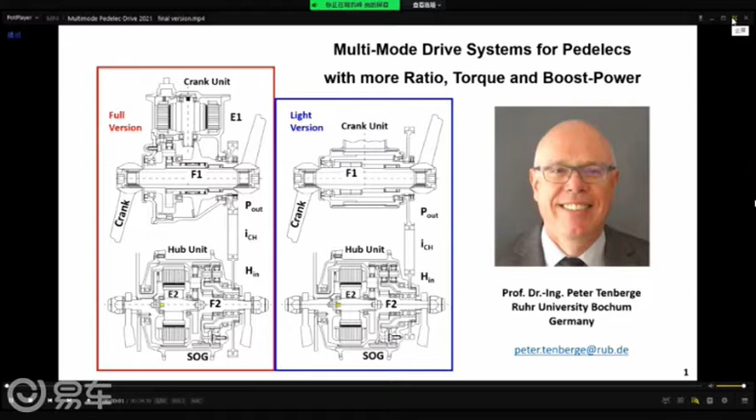Ladies and gentlemen, welcome to my speech about new multi-mode drive systems for Pedelecs. This paper is about two new drive systems for Pedelecs which are split onto a crank unit and a hub unit, and which do not need any additional multi-speed transmission or continuously variable traction transmission.

In a full version of this drivetrain for trekking and cargo bikes, the first electric motor E1 in the crank unit supports the crankshaft. The second motor, E2, in the hub unit controls the transmission ratio, but can also boost the bike in most driving situations.

In the light version of this drive system, for example for city bikes with limited top speed, the motor E1 can be omitted because E2 also provides sufficient electrical boost support.

With the following slides, I will explain the market situation of Pedelecs in Europe and especially in Germany, then the design of these drive systems, and finally some simulations to show the advantages and performance of this technology and the chances in the market.

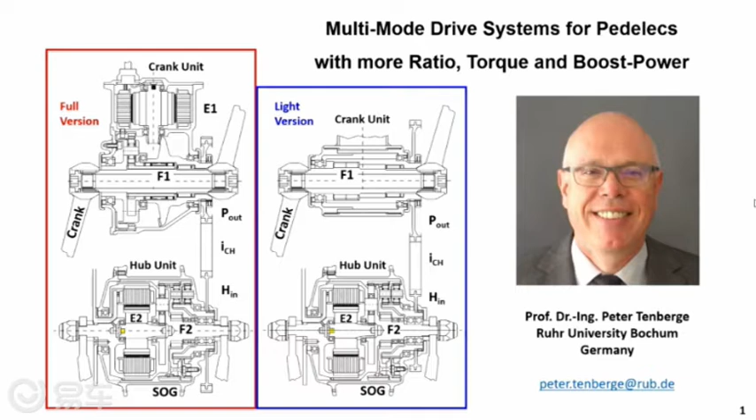My name is Peter Tenberge. I'm a professor from Ruhr University Bochum in Germany. For about 45 years I've been working on transmissions for any kind of vehicle, and my first contact with this kind of power split transmission was already in 1981.

The market for Pedelecs in Germany has grown in the last 10 years from around 0 to more than 2 million units per year. The annual growth rates have been in the two-digit range for years.

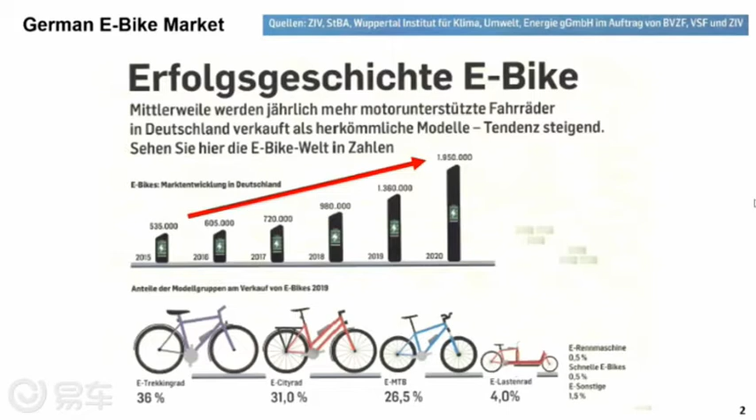More and more customers are opting for these bicycles and like the new driving experience with such a relaxed driving style. During this time, many researchers and developers have enormously improved the power density and controllability of the drive systems, and year by year there are always new providers in this market with interesting drive concepts.

In Pedelecs, persons mainly drive the two-wheelers. They apply their drive torques with their feet via pedals to the crankshaft in the crank unit. Their drive torque is transmitted to the driven rear wheel via an intermediate gear.

If necessary, the driving person is supported by a small electric motor, which either operates with a constant ratio onto the output shaft of the crank unit, or which sits in a hub unit of the driven rear wheel and operates there also with a constant ratio onto this wheel.

In A, this figure shows an S-pedelec for higher speeds, bigger than 25 kph, with an electric motor with a peak power of 800 watts in the rear wheel hub and a chain transmission with 11 speeds between the crank unit and the rear wheel.

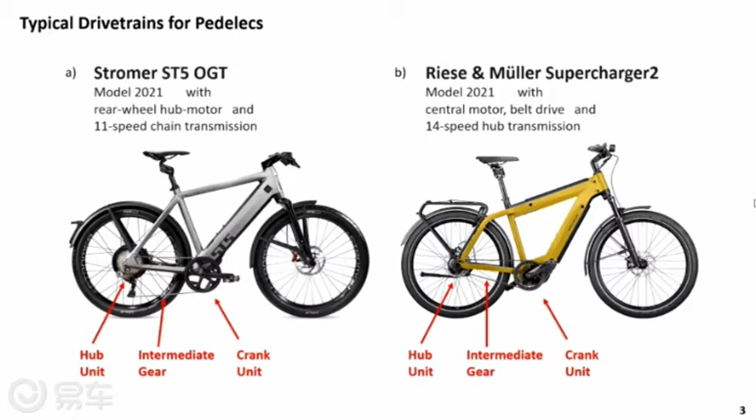In B, it shows a pedelec with an electric motor with up to 500 watt short-term peak power, which is built into the crank unit and which supports the bicycle up to speeds of 25 kph.

This slide shows in A a characteristic map of an electric motor for a pedelec with a maximum torque of 4.5 Newton meters and a short-term maximum power of 500 watts.

The operating software for the pedelec controls the support power in different operating modes. The standard options are 3 to 5 levels of torque support, always proportional to the driver's torque. A fairly new option is a continuously increasing torque from the supporting e-motor if a pre-selected maximum drive power of the driver is exceeded.

That means the driver can specify which physical load he would like to apply for driving at the moment. The remainder of the current power demand of the bicycle should then be provided by the electric support system.

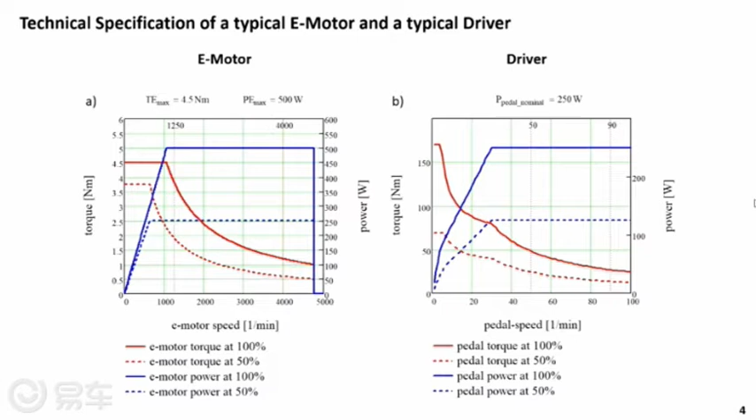The slide exemplarily shows two characteristics of a driver's torque capability to perform at 100% or at 50%. A driver can apply very high torques to the crankshaft at low crank speeds. Older and sick people sometimes have completely different performance maps, or even different performance maps for their left or right leg. Very sporty drivers can achieve significantly higher levels of performance over longer periods of time. In the current bike market, very different drive systems for a large number of driver characteristics can be found.

This slide illustrates the performance of an exemplary pedelec with a total weight of 130 kilograms. In this driving situation, the model driver is ready to stress himself with 100%, meaning a maximum power of 250 watts. The electrical boost should be switched off for now. In this example, the transmission system provides gear ratios between crankshaft and wheel between 1.65 and 0.3. This means the driver can, for example, drive a nominal crank speed of 60 rpm in a speed range from 5 kph to 27 kph.

Below and above the limit ratios determine the crank speed as a function of the driving speed. With this performance of 100%, this driver can climb an incline of 20% up to a speed of 3.5 kph with a pedal speed of 43 per minute, generating a wheel torque of 90 Nm. But even at 5 kph, his power is only sufficient for an incline of 13.5% and a wheel torque of 63 Nm at the crank speed of 60 rpm. Such a strong driver can move this bike on a flat road at speeds just below 30 kph.

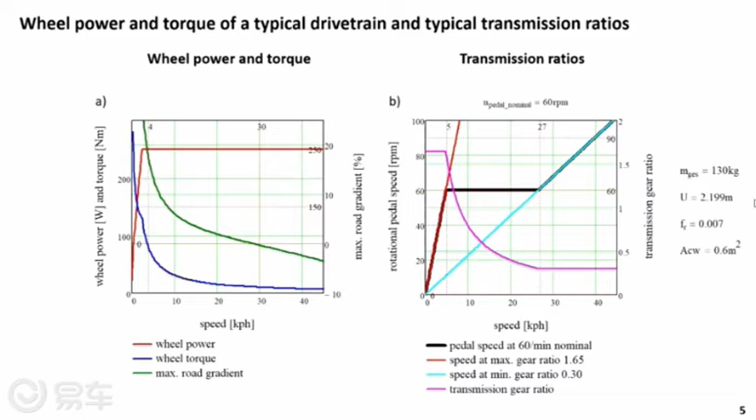A driver who is only half as strong can only drive uphill an incline of approximately 6% at 5 kph and can only reach a top speed of 21 kph without electrical assistance. These physical relations show when and how much an electrical support system should support drivers who currently want to ride with less physical power.

This slide illustrates a possible structure of the drive system of a pedelec with an electric motor in the crank unit and a 14-speed gearbox from Rohloff in the hub unit. The rotor shaft of the electric motor E1 lies parallel to the crankshaft and is connected to it via several gear stages with constant ratios. These gear ratios are in a total range of 25 to 35. A freewheel F2 is located between the electric motor and the output shaft of such a crank unit.

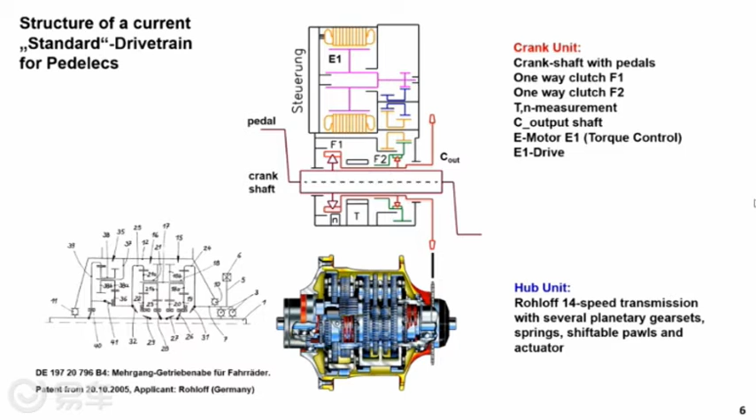This is used to ensure that at speeds above 25 kph, at which in Germany the electric motor is not allowed to support the pedelec, the electric motor can be switched off and no longer has to be dragged along by the crankshaft. Another freewheel F1 is located between the crankshaft and the output shaft of the crank unit, so that the electric motor can alone move the bicycle in a push mode at low driving speeds without the cranks rotating. Two sensors are used to measure the speed and torque on the output shaft of the crank unit, somewhere between the freewheels F1 and F2, in order to know the driver's current performance.

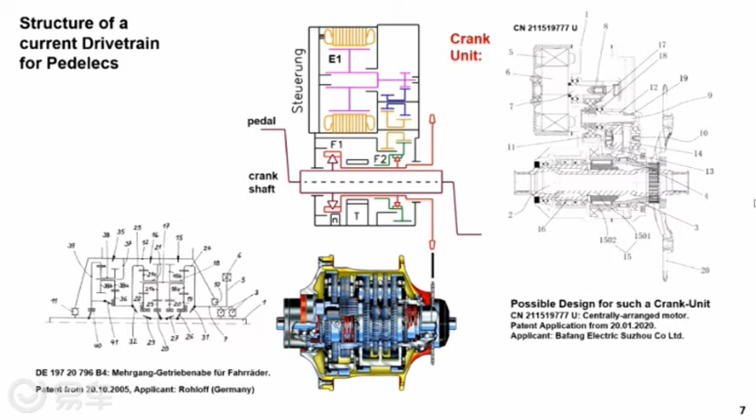Plenty of embodiments of crank units with an integrated electric motor, and also of hub units with an integrated electric motor, are known from the prior art and in particular from the patent literature. There are also companies that offer products for crank units and hub units as well. For example, on the right side, the design of a crank unit from a Chinese supplier with the structure from the left side is shown.

And from the same company, a compact hub unit is known, which is again shown on the right side of this slide. This hub unit has a small electric motor with internal rotor and a planetary gear stage for a large ratio between the rotor shaft, which is connected to the sun gear of the planetary gear stage, and the wheel hub, which is driven via the ring gear.

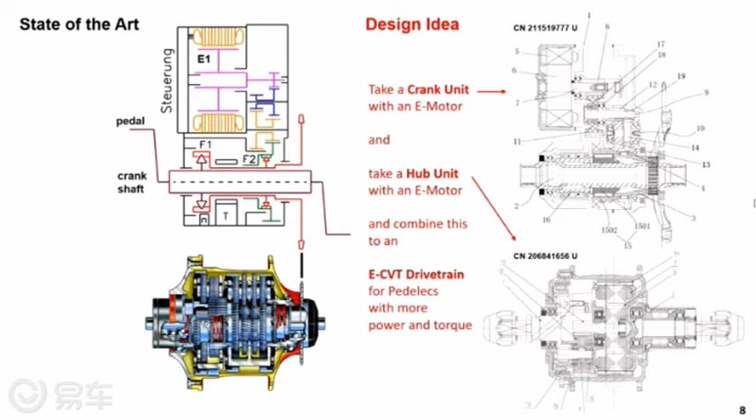From plenty of analysis of existing drive systems for pedelecs, the idea arose to design an innovative and new drive system for pedelecs with two electric motors, which are split onto a crank unit and a hub unit. The first motor in the crank unit shall be used mainly to support the driver, and the second motor in the hub unit shall be used to control different ratios in a continuously variable way.

In principle, the idea is to use the technology from the Toyota hybrid system in a bicycle. The Toyota hybrid system has already been very successful in cars for more than 25 years. It links the crankshaft of a car and the wheel shaft of a car by a speed overlaying gear with a third shaft, or ratio control shaft, which is driven by the second e-motor E2.

This subsystem already offers a continuously variable ratio control, but it is usually limited in terms of output torque. Therefore, another first e-motor E1 operates with a constant ratio directly onto the output shaft. Without any shift system, the Toyota hybrid system offers a very big ratio range to drive small and mid-sized cars very efficiently, because the two e-motors make all hybrid functions possible, like purely electrical driving and energy recuperation.

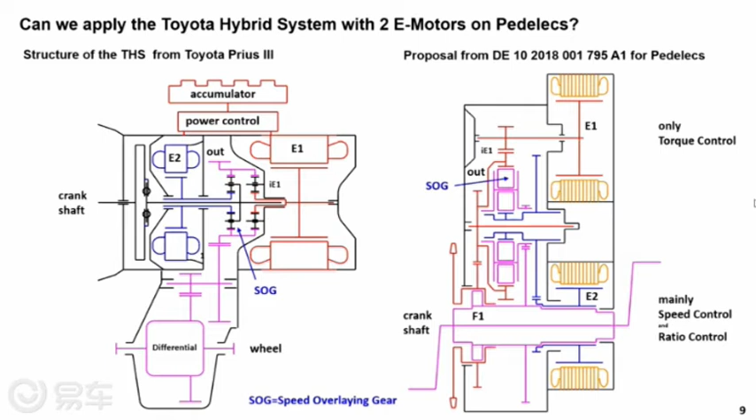In a still young state of the art regarding drivetrains for Pedelecs, there are already some proposals for such drive systems with an electric motor and with continuously variable electrical ratio control in the crank unit. The drive system shown here on the right side is a technological copy of the Toyota system in a special layout for bikes. It will definitely work well, but in this arrangement the crank unit becomes big and heavy.

Therefore, again, the design idea is to design a drive system for Pedelecs with an e-CVT function by two electric motors, which are split onto a crank unit and a hub unit. Two smaller subsystems can be easier hidden between the pedals of the crank unit and in a small wheel hub.

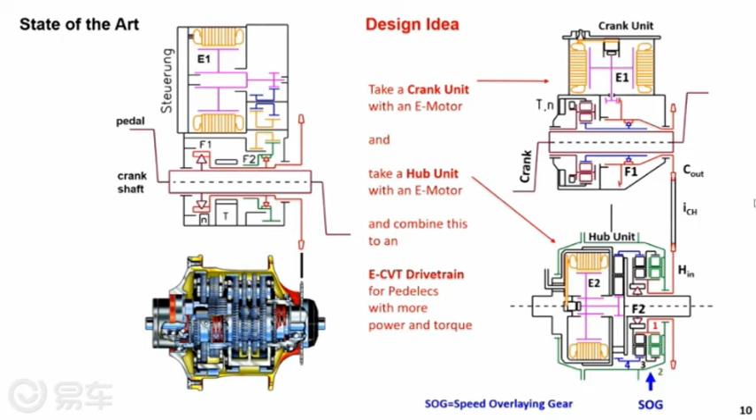Another task is to lay out the system in such a way that in the main speed range above 15 kph, the boost power is transmitted almost evenly via both electric motors. The new two-motor system shall not be bigger and heavier than the conventional drive unit for Pedelecs with one motor plus the necessary multi-speed transmission, and shall offer at least the same driving performance.

This central slide of this presentation shows the basic structure of the new Pedelec drive, which has two small electric motors in the full version. The first electric motor E1 sits in the crank unit and takes over the torque support for the driver, as this is known from conventional Pedelec crank units.

A second electric motor, E2, is located in the hub unit and controls the ratio, but also provides a considerable part of the torque support. The two drive units are linked by a wrapping transmission like a chain drive or a belt drive. In this exemplary layout, its constant ratio is 1.58.

In this crank unit, the crankshaft does not act directly on the output shaft via a freewheel F1, but by a planetary gear stage with a ring gear fixed to the housing. This gearing increases the speed of the crankshaft by a factor of 3.5 and thus reduces the driver's torque by the same factor. This has two advantages.

At first, the freewheel F1, which here is arranged between this planetary gear stage and the output shaft, becomes much smaller and lighter. At second, the driver's torque is now measured in the stationary housing connection of the ring gear of the planetary gear stage.

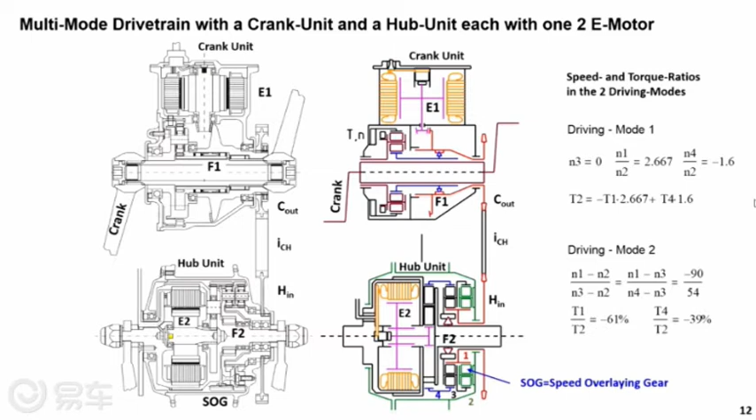In this layout, E2 provides 39% of the wheel torque, and E1 plus the driver provide 61% of the wheel torque.

All the interactions of the subsystems, and in particular of the two electric motors in this drive system, can be explained in the best way by using a few simulations.

This slide 14 illustrates this in a driving situation in which the required output power increases rapidly with increasing speed to 250 watt and then remains constant, as shown in C.

B shows the curves of the speeds on the crankshaft and on all four shafts in the speed overlaying gear. In such a speed overlaying gear system, all differences of shaft speeds are in constant ratios. At approximately 18 kph, all shafts in this subunit rotate with the same speed.

Then the transfer efficiency is almost 100%. At bike speeds below 7 kph, the freewheel F2 is closed, or the speed of shaft 3 is controlled close to 0 RPM. The vehicle then starts off with an almost constant overall gear ratio.

In E, the speeds of the two electric motors can be seen. E1 rotates proportional to the crankshaft. E2 controls the overall ratio, the course of which can be seen in F.

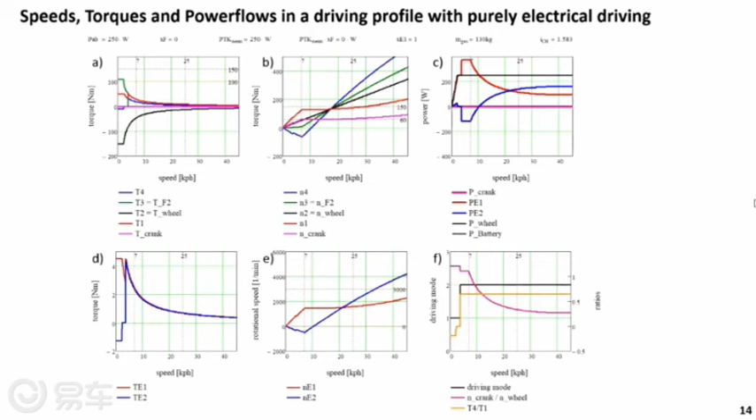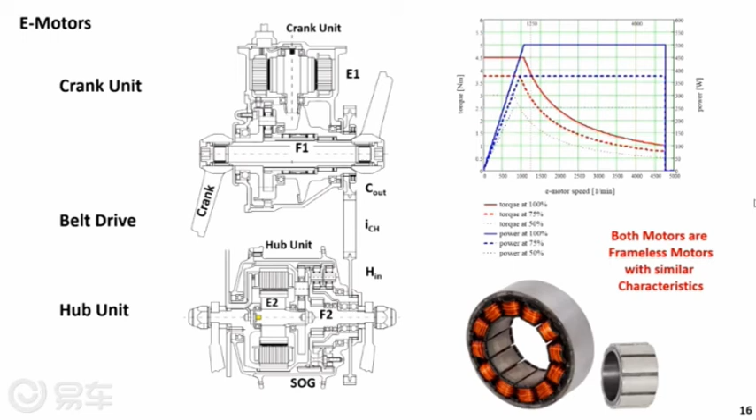Many suppliers offer such motor components with stator diameters between 77 mm and 85 mm, for the required maximum torque of about 4.5 Nm and for maximum rotor speeds of at least 4,500 rpm.

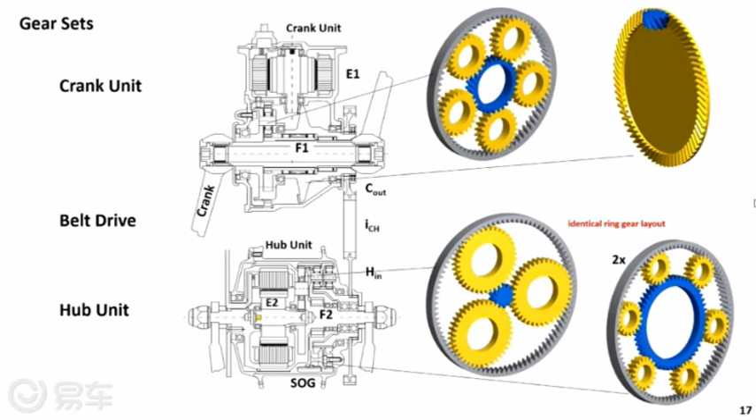In the hub unit, all ring gears have the same toothing layout. In the speed overlaying gear, the two sun gears are also identical. The multimode drivetrain uses two freewheels.

The freewheel F1 in the crank unit can be designed as a very compact needle roller freewheel because of the low torque load. The freewheel F2 in the hub unit is designed as a Sprag freewheel with high torque capacity. Schaeffler, GMN, and other worldwide operating suppliers offer suitable freewheel couplings for these drivetrains.

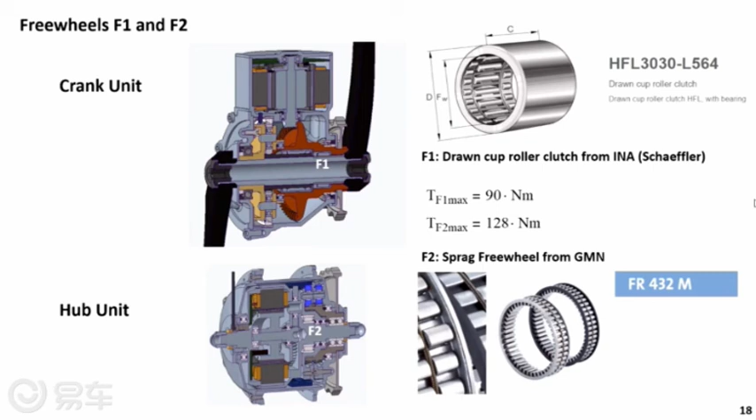Here the full version of the multi-mode drivetrain is shown in a 3D design. The components of the crank unit, including the first electric motor, are very compact, arranged in a main housing with two covers. The components of the hub unit are coaxially arranged in a two-part housing.

Let us now discuss a very compact, light version of the multi-mode drive system. This is interesting because it has only one e-motor but offers continuously variable ratio control and an automatically adjusted electrical boost. In this light version, the motor E1 is omitted, and therefore the crank unit can be simplified a lot. The shaft 1 of the speed overlaying planetary gear in the hub unit is only driven by the crankshaft.

The electric motor E2 has to support a torque proportional to the crank torque in driving mode 2 with the ICAVP function. This constant torque ratio leads to a boost factor, meaning the battery power, respectively the power of E2 in relation to the crank power, increases automatically with the driving speed.

This light version always needs a battery, because the one electric motor must always be active. But with today's battery capacities, this is not a problem, especially since the customers addressed with this drive system anyway want to use always some electrical support.

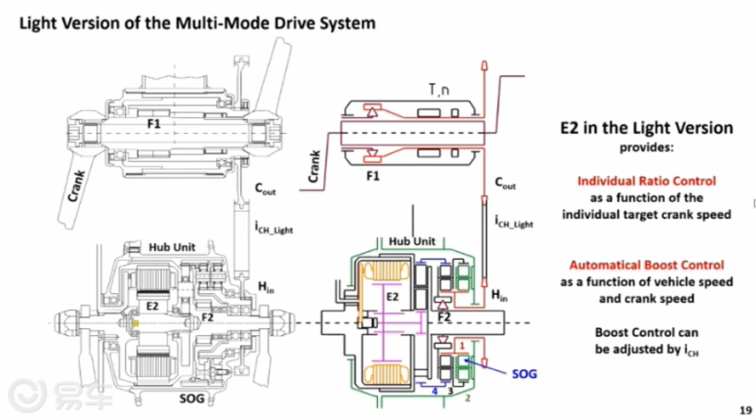If the electrical system fails, a purely mechanical transmission ratio remains in both versions of the multi-mode drive system. In this configuration, this maximum ratio is 1.206. With this ratio, the bicycle can be moved with high torques and reduced speeds.

Slide 20 illustrates some boost factors at bike speeds above 8 kph in the power split driving mode 2 for nominal crankshaft speeds of 50, 60 and 70 rpm, which are achieved after starting at standstill of motor E2. The higher the driving speed and the lower the crankshaft speed, the faster E2 rotates. Then at the constant torque ratio between crankshaft and motor E2, the boost factor increases with increasing wheel speed and increasing wheel power, as well as with decreasing crank speed.

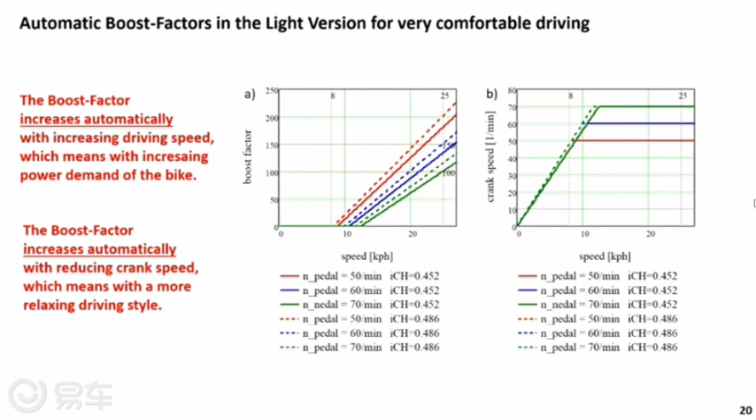This boost characteristic can also be adapted to different vehicle classes or driver requirements by means of the ratio of the chain or belt drive between crank unit and hub unit. For many drivers, it will be precisely this system layout that results in a pleasant driving experience with mostly well-suited electrical support.

The boost factors, which increase automatically with increasing wheel speed, can be seen nicely in the simulation of an accelerated uphill driving up to bike speeds of 23 kph on a road with, for example, 4.5% road gradient. The graphics show again speeds in A and B, torques in D and F, and power flow in C, as well as the efficiency in the system in E.

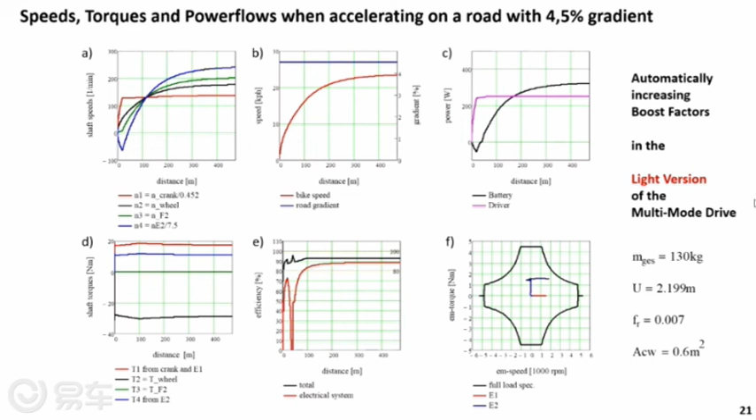The driver has a nearly constant crank speed and therefore a nearly constant torque and driving power. In the light version, the torque of motor E2 is proportional to the driver's input torque, and therefore the torque of motor E2 is also nearly constant. Again, the boost factor is the ratio between battery power and driver's power.

The simulations also show that with such an extremely simple drive system with only one motor and without any additional gearbox, it is also possible to drive the driving cycle according to slide 15. Only the maximum speed is slightly missed, and the steep incline must be driven in driving mode 1 at a maximum speed of 10 kph.

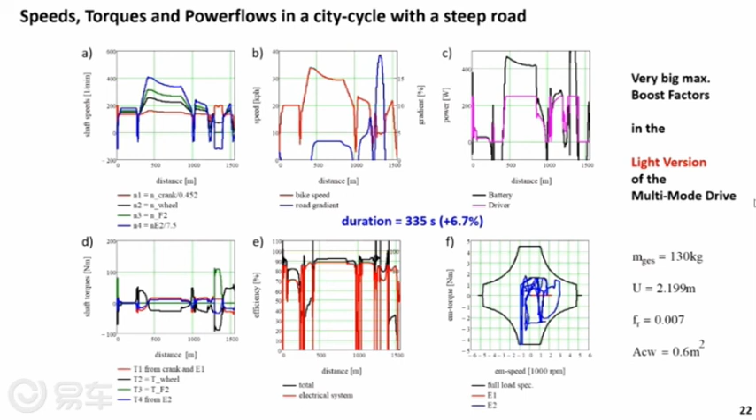With the same driver, a Pedelec with a light version of the multi-mode system needs about 21 seconds more to drive that cycle. But this is mainly due to the steep slope.

Let me finally summarize the main aspects of my talk. The multi-mode drive system for Pedelecs is a drive system with 2 electric motors in the full version or with only 1 electric motor in the light version.

Both versions provide an infinitely variable gear ratio adjustment in the main driving mode 2 and a driving mode 1 at low speeds with a big constant gear ratio for very large, partially electrically generated output torques. Both drive systems do not need any further multi-speed transmission.

The overall system is divided into a crank unit and a hub unit. 2 smaller drive units can be integrated into the bicycle frame in a much more elegant way than 1 large and heavy unit. The big output torque is only set up in the hub unit.

The chain or belt drive between the 2 units is only loaded with the power on shaft 1 of the speed overlaying gear in the hub unit. The torque of this shaft 1 is only 61% of the output torque.

The inverters for the 2 motors are preferably arranged centrally near the battery and its control unit. Both versions of this drive system can recuperate via the electric motor in the hub unit.